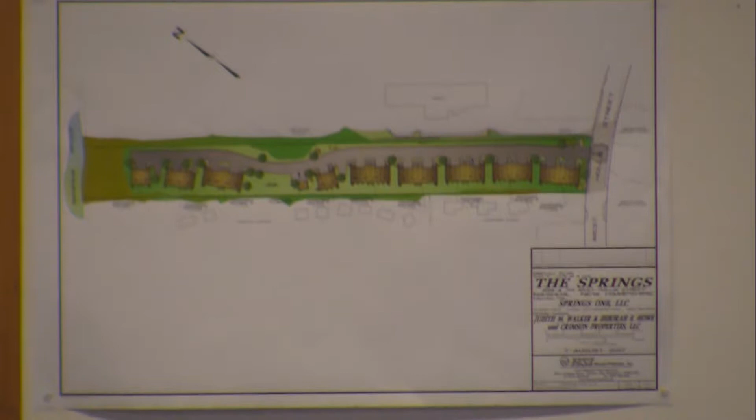So I'd like to walk through some elements of the project. First and foremost, it consists of consolidating the 2 lots that exist to make up the property. The existing home sites and buildings on the front part of the property will be demolished and removed. It's being proposed to construct a private road known as Scenic Drive, which will essentially hug the east part of the property, with a bend to avoid the wetland, ending back in the northern part of the property. A 28-foot wide road with a 5-foot sidewalk along one side.

Now, we tried to site the road along the easterly property line, along the AHEPA property line, to provide more room along our westerly property line. You can tell by the plan here we've cited some of the abutting property homes. On Lowther Place there are 3 home sites, ranging in setback about 18 to 27 feet from our property line. The units we're proposing are approximately 30 to 35 feet of setback in that location.

Moving north towards Hollis Landing, you can see the smattering of single-family detached condominiums, ranging in setbacks from about 22 to 40 feet in those particular units. Our units continue the 30 to 35 feet, with the exception of several units right here - our clubhouse building, a duplex, and the corner of this unit. The reason is the bow in the road to avoid the wetland buffer pushed us closer to the Hollis Landing property line. And the reason I bring up those setbacks is because I want you to understand how we went about this long, narrow, thin piece of property and what we thought was important.

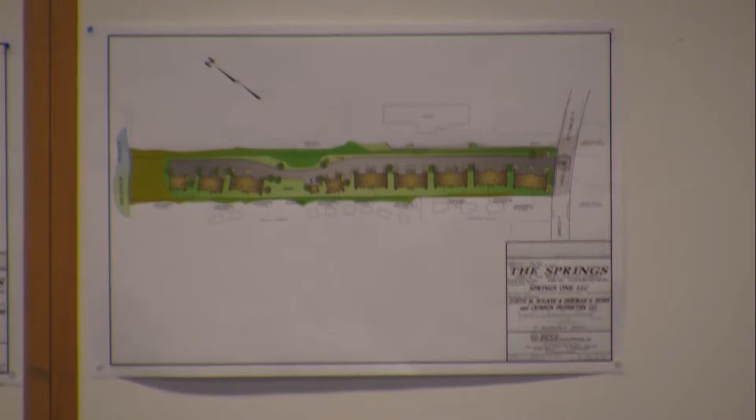Hollis Landing, right next to us - if you look at the aerial, their main body of drainage goes to the river, but they do have some drainage course that works through our property and their property, then ultimately onto ours and into this pond as well. We're providing a pipe right there to continue to carry that flow to that pond, so we're trying to maintain natural drainage patterns.

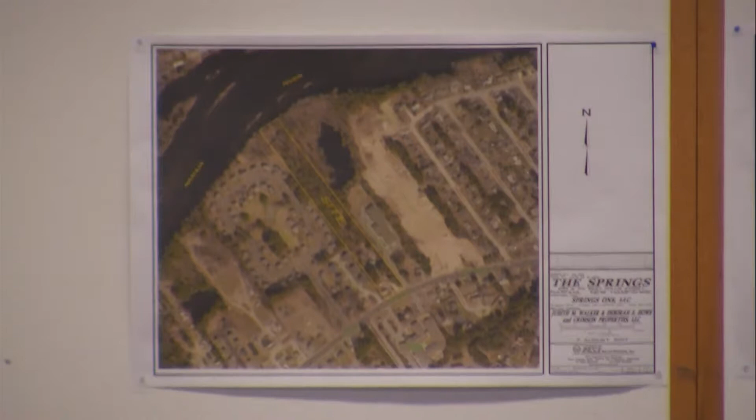Traffic - we prepared a traffic study in support of this application. The report didn't meet the threshold of needing a full study. As we know, West Hollis Street is a through road through Nashua, carrying approximately 17,000 cars per day. As you know, we measure traffic during the morning rush hour or morning peak hour and the afternoon peak hour. Being a

62-plus-year-old elderly community, they're not big traffic producers. In the morning peak hour, the traffic study estimates 6 trips per hour entering onto West Hollis Street, or about one every 10 minutes. In the PM peak, it's 9 trips during that peak hour.

We'll go out to West Hollis Street, or one about every 6.5 minutes. The project is fortunate in West Hollis Street to have that center turn lane, which allows for a safe left turn into the project. And while it's not designed to help the left turn out of projects, it generally does for those properties, as people are able to find a break in the traffic, make the left, get a little safe haven in the center turn lane before they merge into the eastbound lanes.

We have a couple slides on the architecture of the building I'd like to walk through quickly. The project proposes to be a condominium form of ownership, with our client, Springs One LLC, initially owning and renting the units. It is a townhouse-style building, 1 story in height, 22 feet to the peaked portion of the roof, so it's a very low-profile unit.

The unit composition will be 1 3-unit building, 2 2-unit buildings, and 6 4-unit buildings. Each unit measures 1,000 square feet in size, with 2 bedrooms and a basement. Each unit will have a 1-car garage plus a driveway. Behind the units will be either a small deck, patio, or 3-season porch. As you can see on the elevation, pitched roof, vinyl siding in a kind of New England fashion.

The hope would be, Mr. Chairman, with support, to begin construction in late fall of 2017.

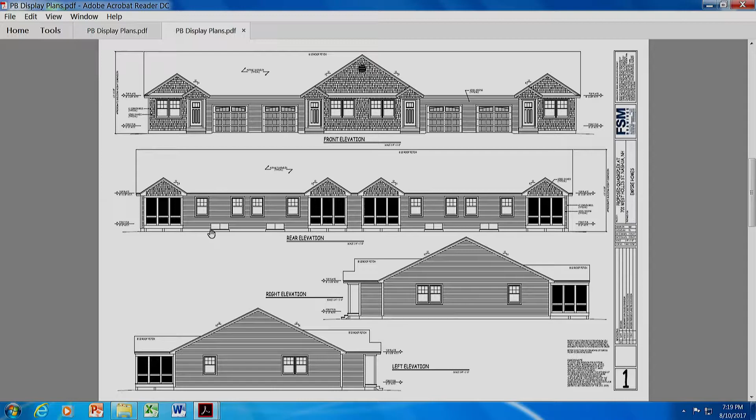Our application did include 1 waiver request, and I'd like to speak to that. Section 19208E-2 is a waiver of the length of a dead-end street. The Nashua Land Use Code allows for roadway extensions by waiver in excess of 750 feet. One of the first things we did with this project is meet with the fire department, explain to them the nature of the project, the long, thin, narrow lot that we have, and that we hoped to exceed the 750-foot limit.

The fire department worked with us. They asked to incorporate 2 T-type turnarounds - one at the 750 mark, and one at the end of the project. In case they ever had an apparatus go down that street, there was ample opportunity for them to back up and maneuver out of there. Of course, they'd be parked with no parking fire lane signs. Those hammerheads are very similar to Lowther Place, right next door - that 6-lot subdivision I mentioned has a kind of hammerhead turnaround at the end of its road.

The other thing the fire department requested was that each individual unit in this project be fully sprinklered. And I think that's important - that's not currently a code here in Nashua. A building like this normally would not require a sprinkler system, but the fire department requested it, and our client agreed to do it, so each unit will have its own fire suppression system in it.

And with those 2 pieces, we were able to get the support of the fire department, and I believe they communicated a letter as part of their review of the project in support of the project and in support of our waiver request.

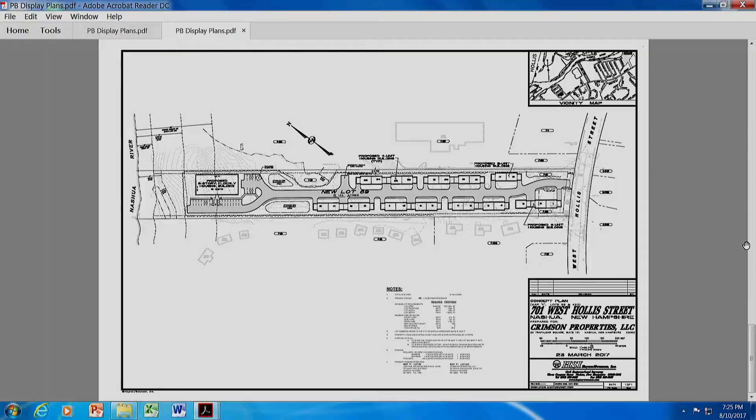Yeah, and just to confirm, there's nothing encroaching into the setback. Correct, yeah, no encroachment, correct. Other questions from the board? Mr. Leclerc?

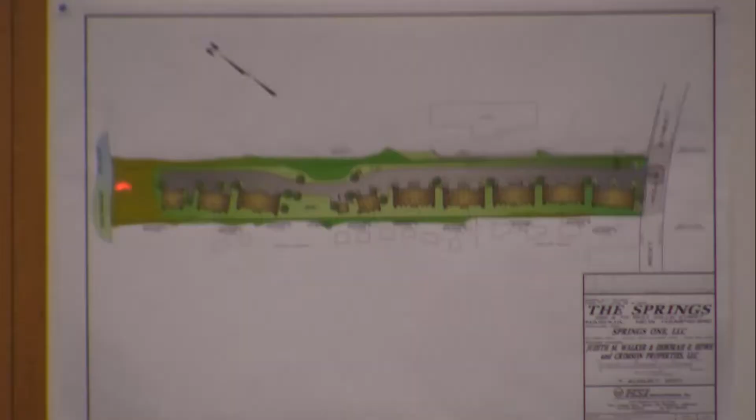Yeah Jim, can you describe trash handling and plowing and the intent of how that's being done? Everything can be done under private management, snow plowing and trash removal. Snow plowing, obviously with the road, we were able to cast to the east for the main road. Obviously the driveways will have to either back blade out or hand shovel and get cast to the east. As with most projects here in New England, if we have those incredible winters where there's so much snow, they've got to get a dump truck and haul it out. But I think we've got ample opportunity on one side—we've got a wonderful 10-foot shoulder beyond the sidewalk here. Obviously we don't want to dump into the wetland, but we've got opportunities along the side of the road to cast that snow off in that direction. Trash removal, I understand, is not a dumpster, it's individual units—they'll put out their trash and a private party will pick that up as well. So everything is private.

And then, is there a generator on the site? No, no generator. Oh, I thought there'd be a generator for the sewer pump station. Yes, just for the sewage pump station. That's it? Yes. So if power goes down, they can still operate their sewer lift station? Yep, yes.

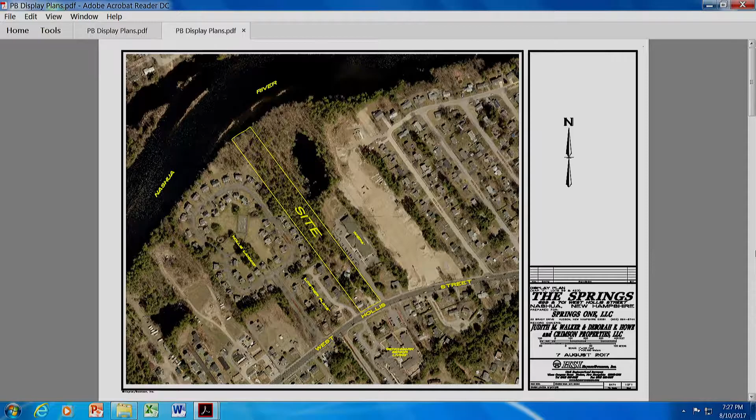And then there was a discussion in the recommended stipulations about the easement for pedestrian and trail access along the Nashua River. Can you explain what the intent is there? I believe the intent has been to try to collect easements along the river from properties as they develop. I know when we represented HEPA, we provided a conservation easement. I may be wrong, but I think there's also one for Hollis Landing as well. And I think the intent was that someday, emanating from the trailhead at Mine Falls Park, there could be a trail along the Nashua River headed west.

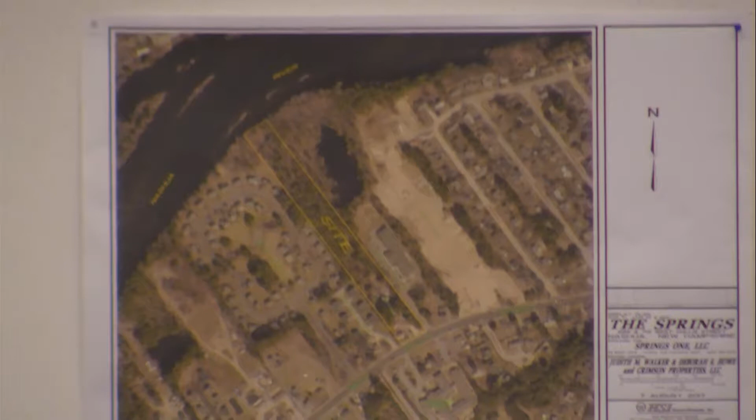That has been discussed with our client. Our client would be amenable to that type of easement to contribute for people passing along the river. They would like a little clarification though. What they wouldn't want to do is provide an easement such that people could drive down Scenic Drive, park, go out fishing, or have a picnic on this piece of property. So through access is fine, they'd be willing to grant that, but anything beyond that would be a little much.

Is there intent for parking on that street, or on the private street? No designated parking along it, it's 28 feet in width. Each car has a garage and a driveway. There are a couple parking spaces for the clubhouse building, and there's also a little central mailbox up here. But it's wide enough that they could park on the side of the street if somebody had a guest over.

That's all I have right now. Mr. Robbins? Mr. Petropoulos, could you explain the setback situation.

If I understand this correctly, when there is a street coming off, the setbacks are still figured from West Hollis Street, the side setbacks, so that what appear to be backyards are in fact side setbacks? That's correct. Could you explain how that works for folks in the audience?

Sure. This is currently two lots, but we're consolidating to one lot. The Nashua Land Use Code identifies minimum setback lines, so people aren't building a large house right on the property line. On this particular property, if I was standing on West Hollis Street looking at it, I would have a front yard setback of 25 feet in the R9 zone. I would have a side yard setback along the easterly and westerly property lines of 10 feet, and a rear yard setback of 30 feet along the back. That's for a single lot.

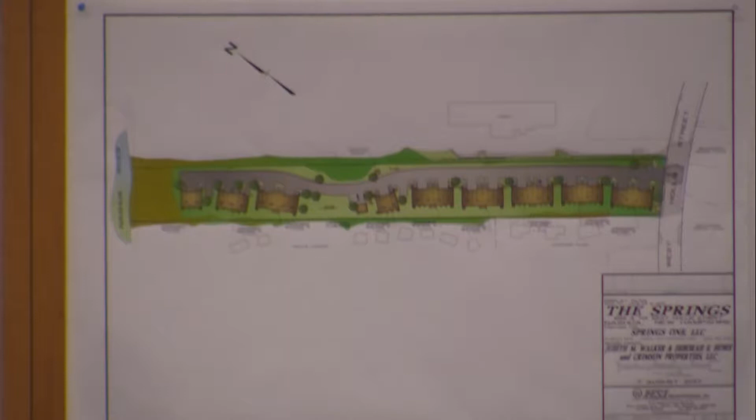Okay, private road, drainage system, on a lot of private roads we've had problems with. What I would like is your engineer not only sign off when he's doing it, but when it's completed, the retaining wall, the road system, that he signs off that it's done to spec. Is that possible? You're kind of asking a larger question, one that could be asked of any project in Nashua. Usually what happens is the engineer signs off, he develops it, but then the contractor comes in and doesn't build it exactly to his spec.

That's not how it works in Nashua, I would hope, but I'm just saying, your engineer, the company, whoever's doing it, should sign off after the project is done. When I was working down in Boston, we would have an engineer not only sign it off, but the architect would have an independent company come in and sign off that it's done properly. We do that also on other projects in other communities. Well, that's not the case here now. Often the city requires an as-built survey of a particular project. They haven't asked for that here, but let me consult with my client during break and talk a little about that, and I'll respond later. I think you're asking us to do a little bit more than what's normally done here in Nashua.

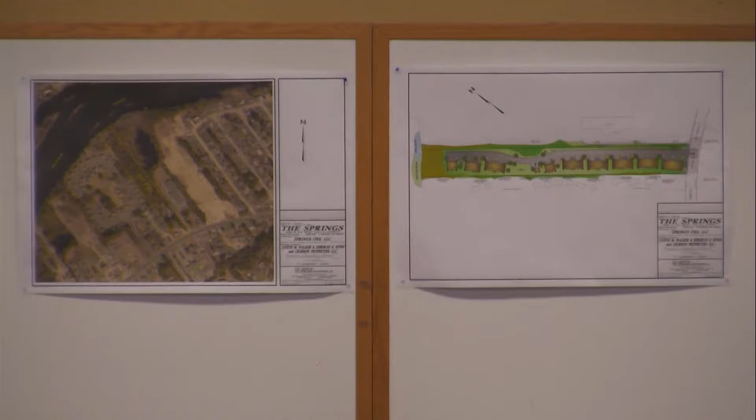Better for me and others, I suspect. My name's Brad Westgate, Mr. Chairman. I'm a lawyer with Winer and Bennett, 111 Concord Street in Nashua, representing the applicant. I'd like to address a number of things and try not to be too lengthy in my presentation.

First, I'd like to touch on the project's compatibility with the amended Housing for Older Persons Ordinance. The Board of Aldermen this past March adopted amendments to the ordinance. It was an effort undertaken after considerable thought and effort by them, and also input from the Aldermanic Planning and Economic Development Committee and from this planning board. There were a number of public hearings held by both the committee and this board, as well as presentations and discussions at the aldermanic meetings themselves prior to adoption.

Mr. Trammell and I appeared at virtually every one of those meetings. In essence, the initial proposed amendments to the ordinance were prepared by Attorney Bolton, Corporation Counsel. He submitted drafts to the Planning and Economic Development Committee, and they were discussed at the meetings. I reviewed them, had some comments, made some proposed changes to the language, and presented my changes and thoughts to the committee and to Attorney Bolton. A combined effort resulted in the final version of the amended ordinance that the Board of Aldermen passed this past March. I think everyone involved was fairly pleased with the interaction that occurred, the thought that went into it, and I was appreciative of the committee's openness to interact with us on the ideas.

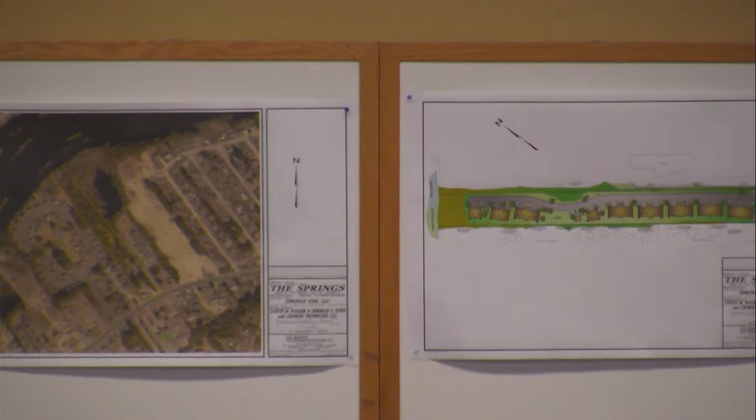We've got good swale work right behind the property, making sure anything that sheds onto their property, everything goes into our stormwater management area and then off. So the design is sound. The execution and the inspection is something probably the board and the city need to tackle.

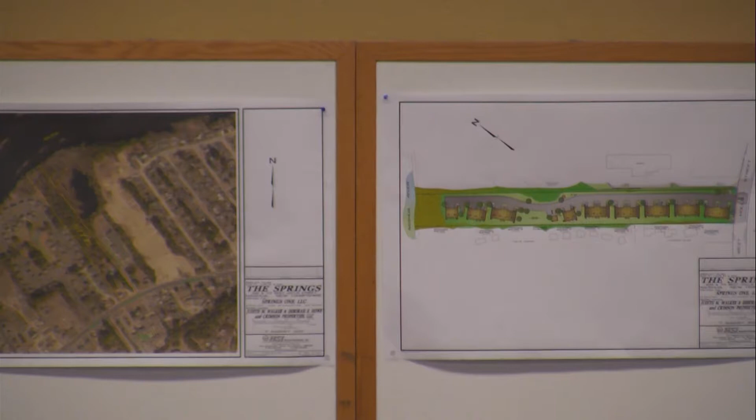About private sites, I will tell you that all the work will be bonded. I will tell you that the drainage work in this location will need to be inspected by us as part of our alteration of terrain permit. But that's the extent of it today in Nashua. It's a private road; if it were a public road, it would be inspected by DPW staff for every element along the way. So I think those are the 3 areas, and I'd be glad for any follow-up. Mr. Weber? Just to follow up, Jim.

Does your architect, to protect the architect, have any inspectors to inspect the compaction that is requested or noted? Do they have an inspection, independent testing company that does this to protect the architect?

Yeah, I think you're mixing terms. The architect would be the building. All the building systems, structure, foundation, plumbing, electrical, that's all inspected by the city. So no issue there.

I think what you're talking about is the site. Is the road built to spec? Are the utilities built to spec? Is the pump station built to spec? And what I'm saying to you tonight is, unfortunately, that doesn't exist in Nashua. You don't have that requirement, not for this project, but not for any project.

No, that's not what I'm talking about. What I'm asking is, does the owner go out and hire an inspector to be his eyes and ears on the project? A clerk of the works? I don't know if that's what Randy has done on other projects here in Nashua.

What I do know is the improvements need to be bonded, so somebody's got to release the bond once that's done. And the drainage here will need to be inspected. That's part of the new alteration of terrain regulations.

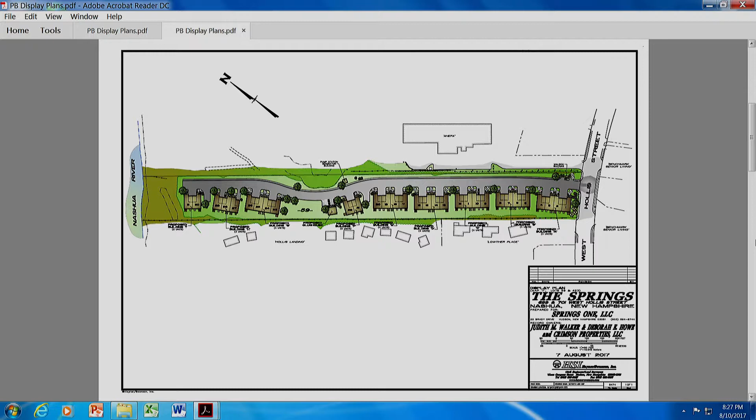Is there an opportunity to change the construction of the sidewalk and allow that portion to be in the buffer? Not without going through the zoning. You'd still have to do that? Yep, unless it was just a grass sidewalk, they would have to go through that. Yeah, all right, I was just wondering. Thank you.

I'm sorry, I'd ask Mr. Lamarck or Mr. Trotter, you had the opportunity to hear the applicant's responses. I'd give you one more opportunity, if you'd like, to come speak to those responses from the applicant. Just one question, sure, and again I know you've already done it, but if you could just identify yourself for the record again. Robert Lamarck, 32 Norman Drive, I'm on the board at Hollis Landing.

But the developer had mentioned changing the setback on units 22, 23. Just wondering when he would get back to me, or back to us or you, with any ideas about making changes that might make that more amenable and how that would actually work. Whether it's changing the sidewalk configuration, moving the road over, or angling the building a little differently, what he would propose to do that and when we can find out about that.

I think what we would likely do is, if we were going to approve the plan, we would make it a condition of the approval that the applicant, consistent with their intentions, work with city staff to change those plans in a way that would create that additional buffering. I'm just more interested in the property values of those couple of units. I don't want to see them really deteriorated because of an 8 or 10-foot setback in that area.

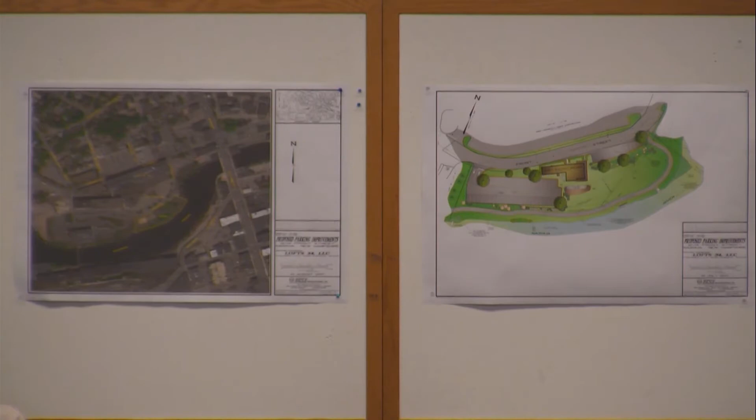While we're at this, I believe you already addressed the waiver, but I wanted to ask staff: is a waiver required regarding the parking lot not needing to break up a vegetated island, because the number of spaces in a row is for parking spaces where there are more than 10? It's a 10, yeah, and it's on outer parking lots, for interior rows. We have interior rows, but we're on the exterior. Our exterior lines are on the outside, so you've got green on the outside and green on the outside. What that ordinance does is for supermarkets and malls -- they don't like the big long rows interior to the perimeter. For this project, a waiver's not required. All right, thanks.

Okay, I think it would be helpful if Chris said a few words and answered your questions. Chris Lewis from Brady Sullivan. Sure, that'd be great, thank you. I'm Chris Lewis, Brady Sullivan, I'm the architect. I don't really have a whole lot to add, I think Jim did a great job, but I'd like to answer any questions and express our appreciation for your consideration on this matter.

So, Ed, you had that one question? Yes. Parking? Or Chris, permits? At some point in time, it's on the Greely house?

Yes, at some point in time in the future, would you be willing to work with the city of Nashua to turn the Greely house into a historic center to showcase all the different historical buildings and the chronological stages of Nashua for historic value? And the other question is whether, and I'm not sure if it's already there, to have a historic easement on the Greely house. Something to think about -- not something that's going to be part of what we're doing here, it's just a question for you.

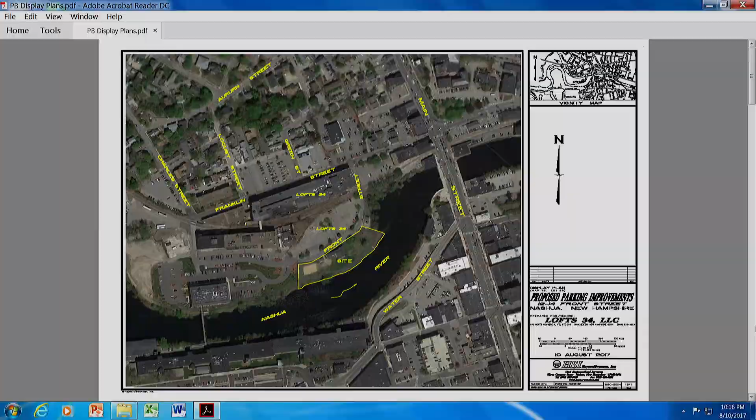Steve is right about the beauty of the river, and the city is developing a riverfront plan. We've come forward with a project that would add, over time, $20 million of improvements along the river, river walks, and other really striking improvements. But as long as the front of the house is preserved with the lawn, this is not inconsistent with anything in the riverfront plan, which has been presented but not yet written into a final report. In any event, I still think the two spaces are valuable at the moment, and will help make this a successful project.

Mr. Barber: The Mayor brought up a point I now recall. Brady did make the commitment that this won't necessarily stay, that if in the future another parking area comes forth, this will be removed. They want to take this out if parking can exceed what they need elsewhere. This is temporary - in the minutes it says this would be temporary, I'm not going to put words in their mouth, but that if other parking areas become available, this can go away, because we wanted no parking in front of the house at all. But we said fine, because you needed it, that's okay. If in the future you can take it away, that would be great.

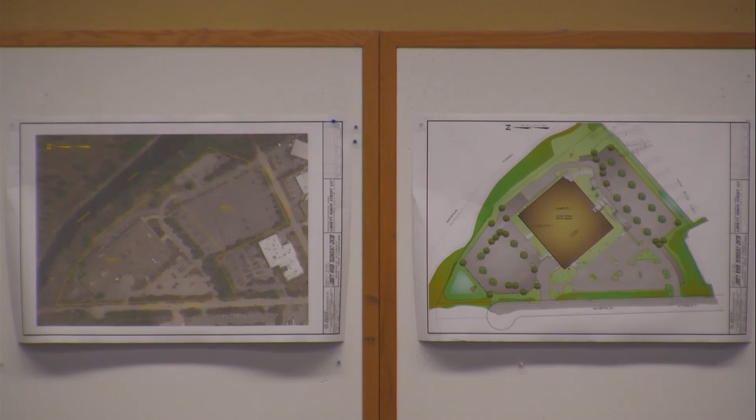Who owns this now? A group out of Boston, real estate developers, Liberty Properties. Their entity is something different, I think it's called Liberty Woods Development. Can you put them in connection with Mr. Cummings, just so he could help with the undeveloped lot? They've been longtime owners here. They also bought the Corning building when that went down and redeveloped it. So they've been in Nashua a number of years.

Mr. Weber? So you asked for things. What's gonna happen with the dumpsters? I don't see it. Gotta ask, you asked for input. I think it's all in the loading dock area. Okay, I didn't see it, so I asked. You asked for input, and I would not be laughing the whole time.

You bet I'll know the answer on the 14th, though. Yes, you will. You're gonna have it there because I don't have to ask. We'll have it there. We'll find out.

So they asked me to appear, just to introduce it to you. Again, the predominance of the construction is the demolition and the interior work to get this tenant. It's under a tight time frame.

I'm gonna leave here thinking that I've got some good comments that we will address, and I'll communicate that there wasn't anything fatal. Traffic, fire department, dumpster, open space, environmental access. Okay, good.

And I thank you. Now, can I say one thing? Because the first case we didn't really get to completion, the notion of the city wanting to ensure sites are built in accordance with the approved plan is a very good notion. It's not that hard to get there.

Other communities do it, in the manner by which they say that prior to a certificate of occupancy, the applicant shall provide from a professional, could be engineer here for site, a letter of substantial compliance ensuring that the project has been completed in accordance with the plan. That's very fair. What's it take to get there?